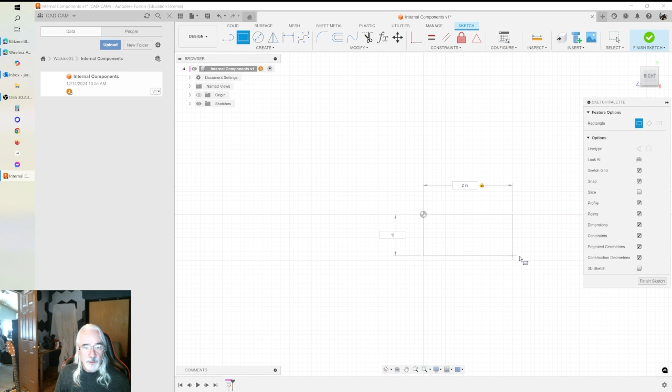He first has you create a sketch to make a component. We're going to make a simple rectangle here, 2 inches by 1 inch. And we'll extrude that to create a body, 1 inch. And so now we have our body, and so he has you go to that body then and click on Create Components from Body.

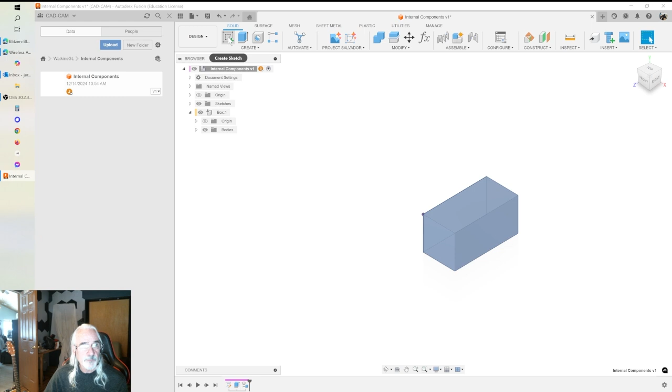Okay, so now that body is a separate component, and we're going to go rename that to rectangle. It's actually not a rectangle, it's a box. Let's say a box. And we have our first component. Then we're going to go and create a second body. So we're going to create another sketch. And this time we'll make a cylinder.

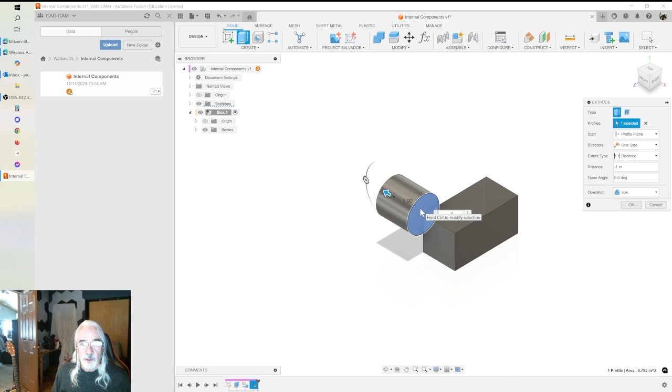We'll make a 1 inch circle. And then we'll go extrude that. Make a 1 inch cylinder. Minus 1 inch apparently. And we're going to make a join body. Say OK. Okay, so now it created a new body, and we'll go to that body and we'll say Create Components from Bodies. And now we have a second component down here, a cylinder.

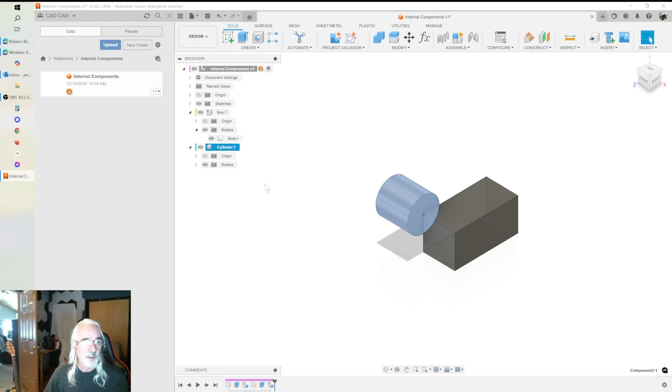And this works, but the downside to this is that these components, the sketches are tied to a base here, and the bodies are in a separate component, so they're not encapsulated. So I don't have an easy way of knowing what this sketch is associated with. Is it with box, or is it with cylinder, or what?

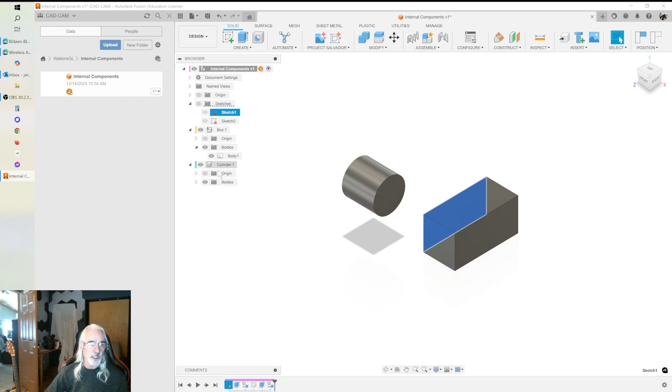So what I call encapsulation is that everything to do with a particular component is encapsulated within that component. And the advantages to that are, one is that any sketches in this component are associated with that component, versus these sketches which you don't know. Sketch one, you can figure it out, but if you have a complex model with 10, 20 sketches, you don't know which sketches necessarily belong to which components. So it's better to encapsulate them within.

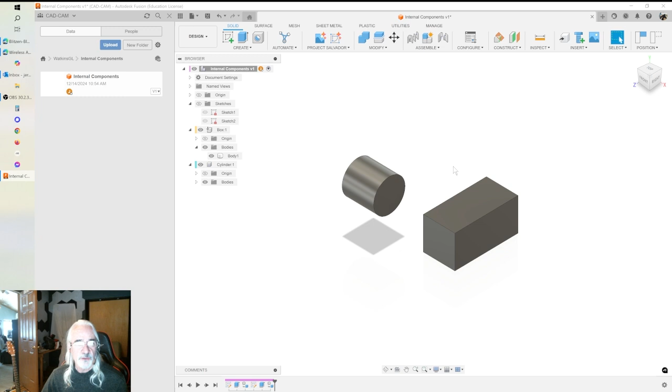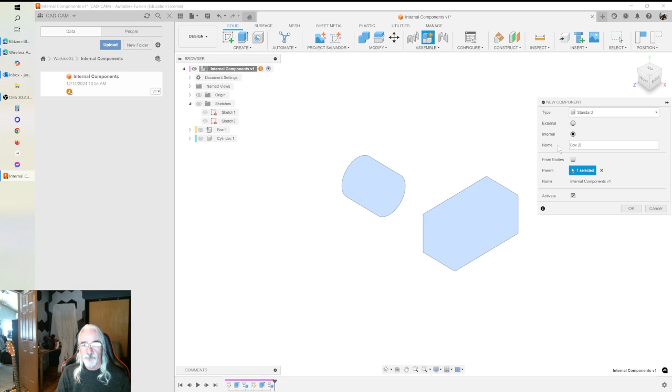And so to do that, the alternative way to create these two components, I'm going to turn these off, is to instead right click on your base component and say New Component. And now we're going to give that a name, and we're going to say Box 2, and say OK. Now we've got this empty component here, and we activate it, make sure that little dot in that circle there is clicked on. If the base is selected, it looks like this, and to activate this, we go down and click on that box and activate it.

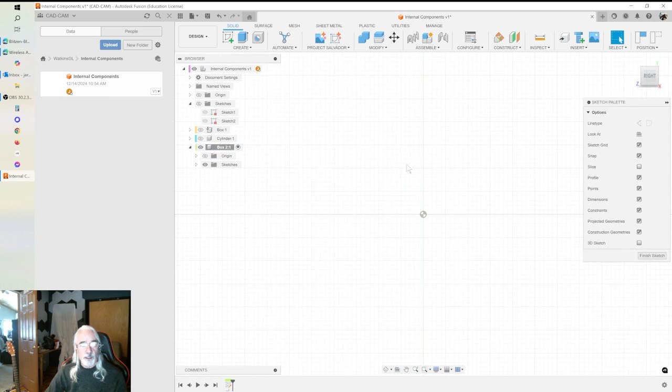Now I'll create a sketch, and create my box 2 by 1, finish sketch, and extrude it 1 inch. Now we can see over here that my sketch and my bodies are included within this component. And so there's no confusion about what that is.

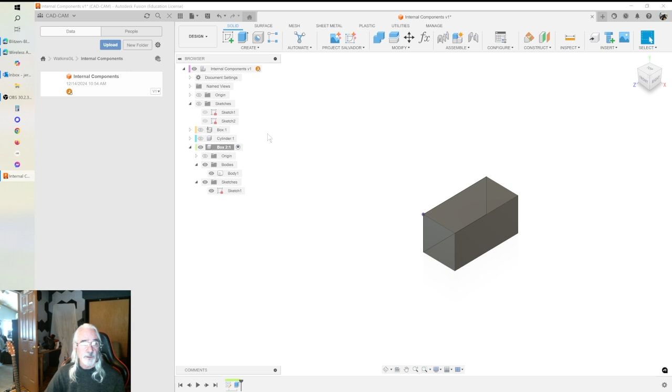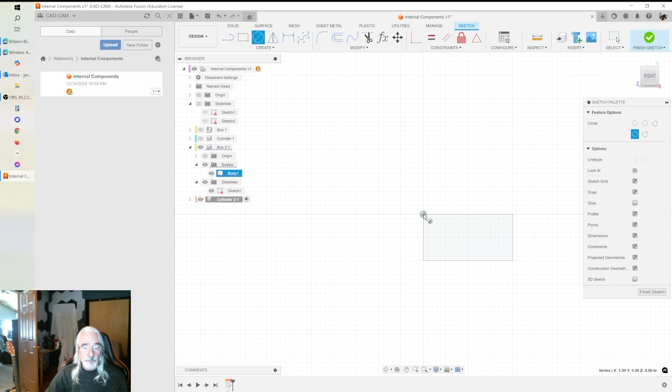I can create my other one. I go up here again to my main component, activate it, and create new component, cylinder 2. Make sure it's activated, create a new sketch, make my circle, finish sketch, and extrude it,

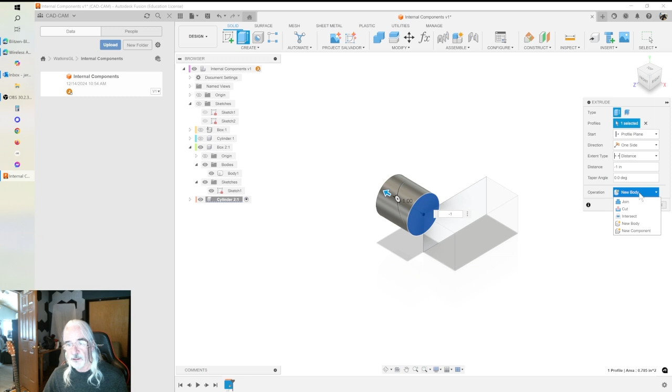-1. Make sure you choose new body here, because if you do join by accident, no new body will be created in this component. Instead, it'll be joined to the body in the other box component. So I'm going to say OK. And we see now again that this sketch we know is associated with this body because it's encapsulated within that component.

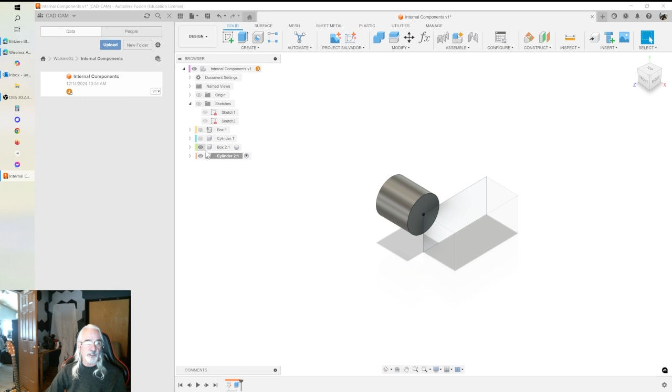That's the other advantage that I know of at the moment is that if you want to create an external component of this, to be able to take this component and use it in another part, you can use save copy as to save these components, but if you save copy as on this component, the sketch that's associated with it will not go with it. All you will get in that new component is the body, which means that now you cannot modify that.

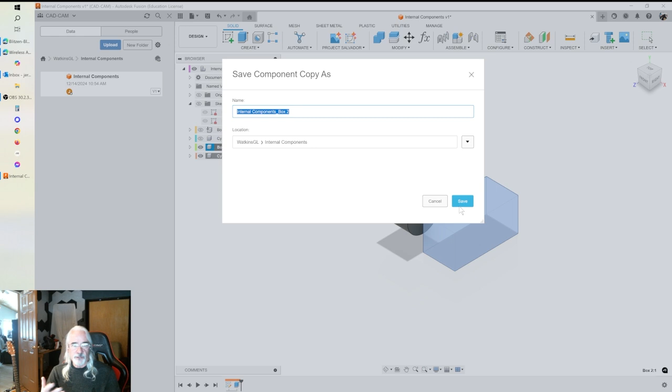In this one, if you do a save copy as, the sketch and everything associated with that component goes with it, and then you can use that component in another project and modify it because you have the sketch. So those are the advantages. That's the alternative way to create components in Fusion.

So those are the two ways to create internal components in Fusion, and even a tad bit there on how to export that into an external component that can be used everywhere else. I might argue that the second way is a better design philosophy. It's what you might call object-oriented, where everything to do with a particular component is encapsulated within an object, which results in a more discrete object with less ambiguity and more shareability.